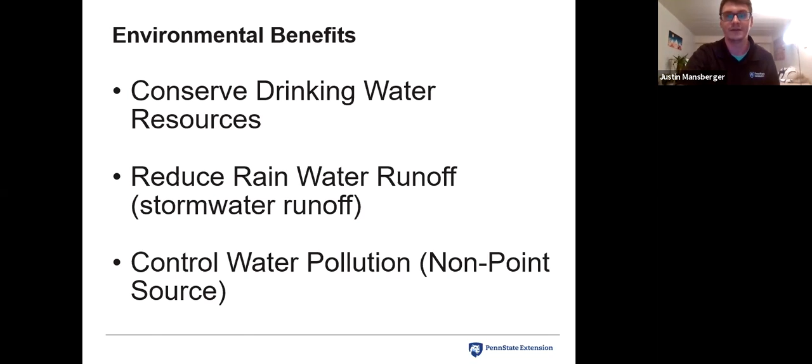There's something called a sizing equation—I didn't want to go through too much math today, but it's a relatively simple equation, and I recommend looking it up if you're curious about getting a rain barrel. Basically, it takes the square footage of your roof and multiplies it by the amount of precipitation to figure out how much rainwater you would get.

We ran the sizing equation for this roof size, which is pretty average for a small home—800 square feet. A 1-inch rainfall event will give you 500 gallons of rainwater for this roof. A 45-inch rainfall per year will give you a total of 22,000 gallons. So there's a lot of water you can gather and use for various purposes with a rain barrel.

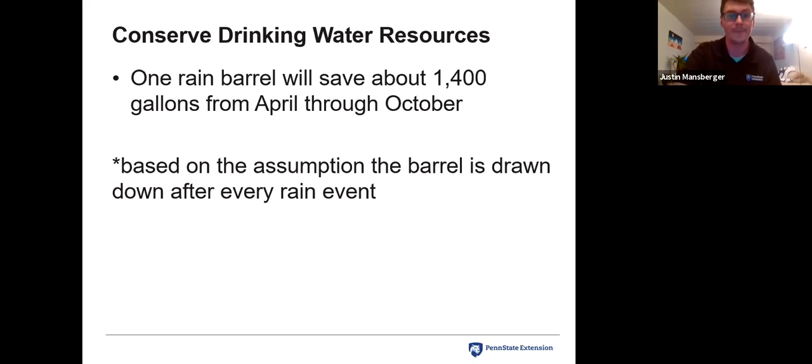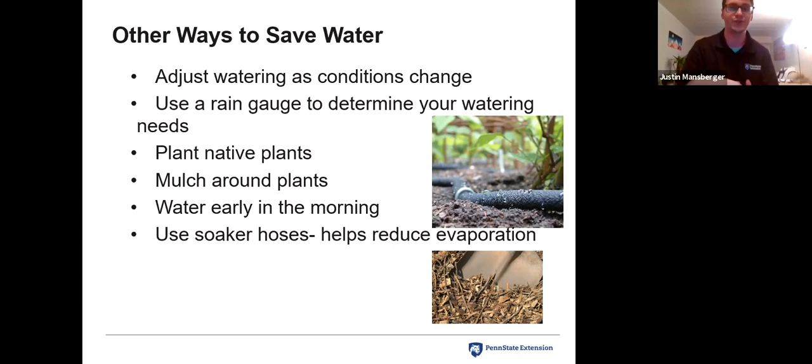Other ways to save water: adjust watering as conditions change. Rain gauges are great ways as well. Planting native plants tends to be more water conservative. Mulching around plants, watering early in the mornings when it's not too hot, and using soaker hoses all help reduce evaporation and reduce rainwater or stormwater runoff.

Here's a nice diagram. On the left we see natural ground cover—in a forested environment during a rain event, about 50% of the water gets infiltrated and only about 10% runs off. That's really ideal compared to a highly urbanized area, which has about 75 to 100% impervious cover—lots of buildings, sidewalks, and pavement. This only allows for about 15% infiltration compared to 50%.

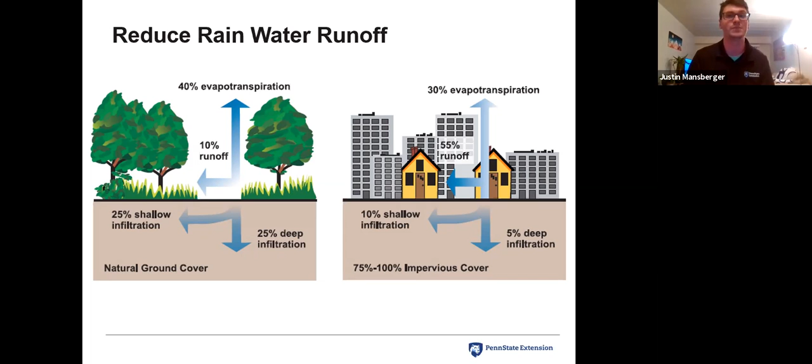You can see here the runoff is much higher as a result of all that impervious cover. Almost or over half of the water that drains down goes as runoff, picking up pollutants and causing lots of problems.

Reducing rainwater or stormwater runoff is really important, and that's another way a rain barrel can help. The volume of water from impervious surfaces exacerbates flooding and stream bank erosion. Rain barrels help reduce the peak volume and velocity of stormwater runoff by catching water from the gutter instead of letting it flow freely onto impervious surfaces.

You can see here in the top picture that's really flooded, causing a lot of flooding problems. And in the bottom picture, you see stream bank erosion caused by a lot of runoff that wore down that stream bank over time.

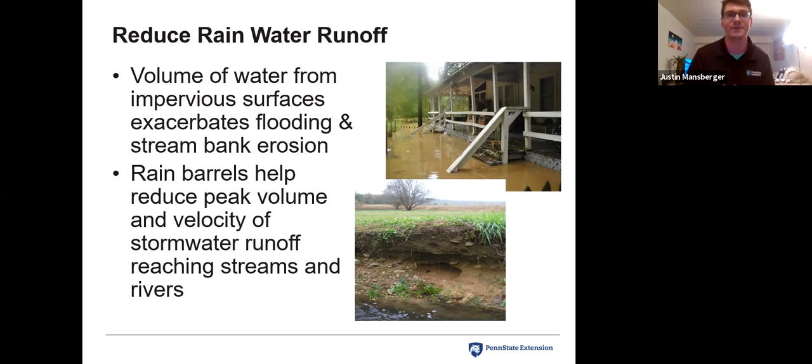So another important thing about reducing stormwater runoff is non-point source pollution, which is created as rainwater passes over land surfaces and picks up contaminants en route to entering our local rivers and streams. Rain barrels will reduce the amount of runoff that runs off your property, collecting it right off the gutter. This helps reduce the amount of non-point source pollution that would harm aquatic and human life and cause problems in streams, with excess nutrients and sediment entering those streams and rivers.

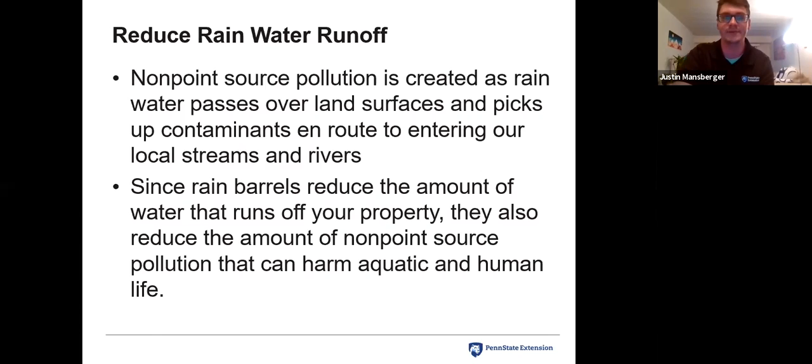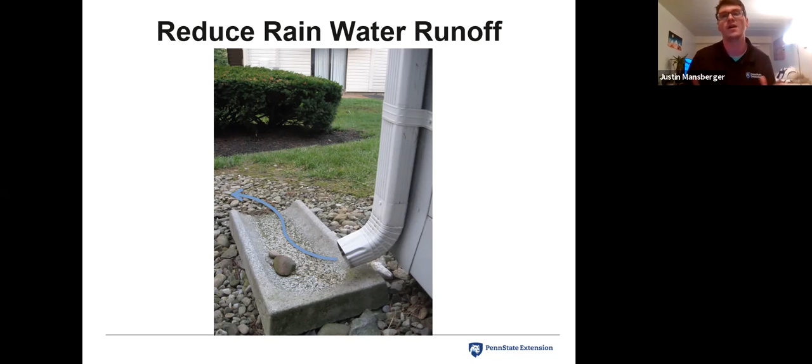As you can see here, this is a typical downspout for a house. It basically runs off right into those stones, then probably flows into the street, maybe into a gutter, eventually right off into the lawn. It hits some of those impervious surfaces and continues to run off, contributing to that non-point source pollution we were talking about.

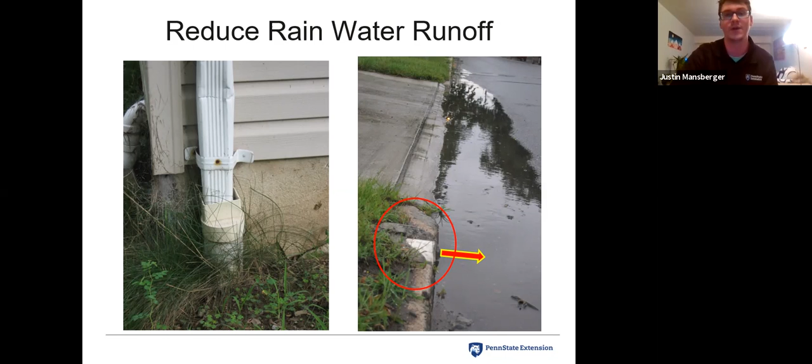Continuing on with those examples of non-point source pollution and flooding, here's another example showing the flow of rainwater and stormwater coming down from the house and also along that sidewalk, then going down and pooling up there. You can even see up the whole length of the road that flowing stream. This is really commonly seen when you have too much impermeable surface and too much stormwater runoff going into a street—you'll often get those flooded sidewalks or streets.

So it's really important, as we mentioned, to control this non-point source pollution. Generally, if you think of non-point source pollution, it's basically our general people pollution—what people contribute is considered non-point source pollution. The alternative term is point source pollution, meaning there's a specific point we can find that the pollution is coming from. This is usually associated with factories, waste disposal, or wastewater treatment sites—you know exactly, and can pinpoint one spot causing the pollution, versus non-point source pollution, which is a conglomerate of everything.

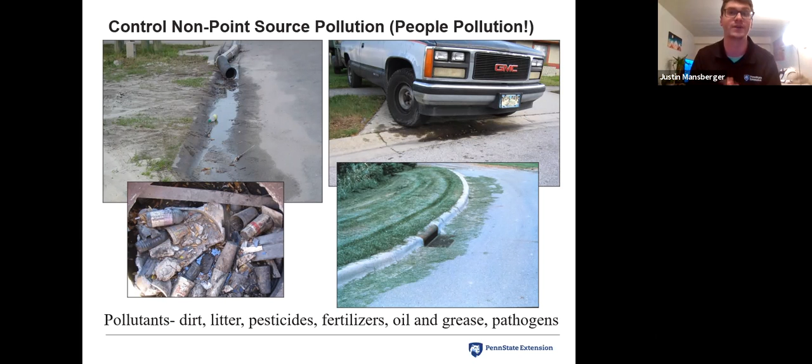Some examples of non-point source pollution: sediment is a huge one. Sediment's actually the second highest pollutant in our streams. A lot of people don't consider sediment a cause of impairment because, okay, it's just dirt, not really toxic or harmful. But sediment can cloud the water, impede aquatic plant growth, clog gills of aquatic life, and even clog BMPs from functioning properly, like rain gardens. It can block them from functioning correctly. So sediment is definitely a major cause of non-point source pollution.

Excess nutrients as well, from agricultural runoff or fertilizers, these can cause algal blooms with eutrophication and cause a lot of fish kills as well. And then obviously bacteria and other pathogens, E. coli, coliform, stuff like that can get into swimming areas and create hazards for both humans and aquatic life, and wildlife.

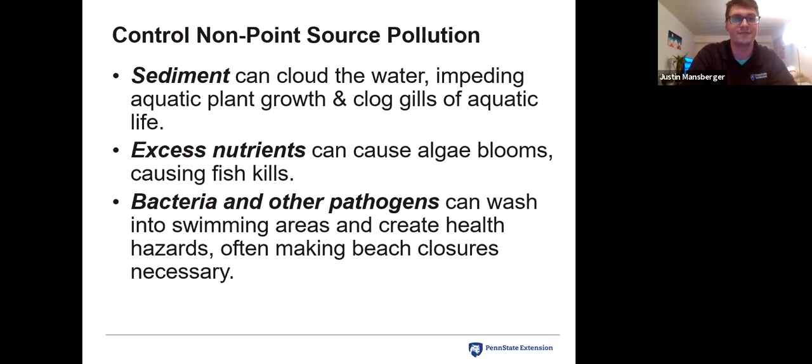Continuing on, debris obviously is a big one. Plastic bags, bottles, cigarette butts, any of this stuff can be washed away, picked up, and degraded into our streams, and obviously has a lot of detrimental effects for aquatic life.

Another really harmful one is household hazardous wastes. So any of the things listed: insecticides, pesticides, paint, motor oil, especially auto fluids, other things like this can often get into rainwater and mix with runoff and then end up in streams as a result of all this excess pollution and non-point source pollution.

So all in all, this polluted water can affect drinking water sources, and this in turn can affect human health, and it increases drinking water treatment costs, because the more stuff they have to treat for, the more expensive it's going to be as well. So it kind of goes back around in a circle.

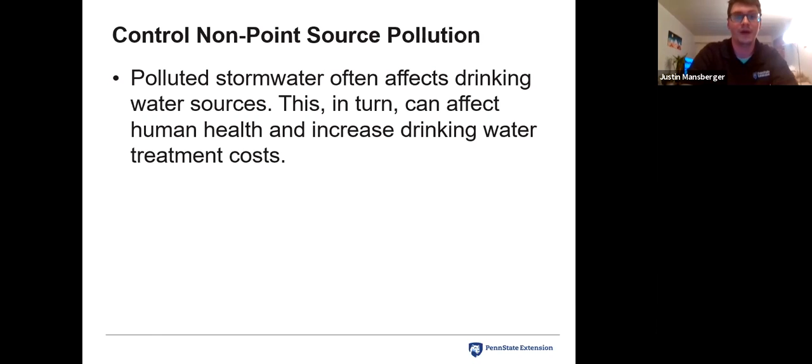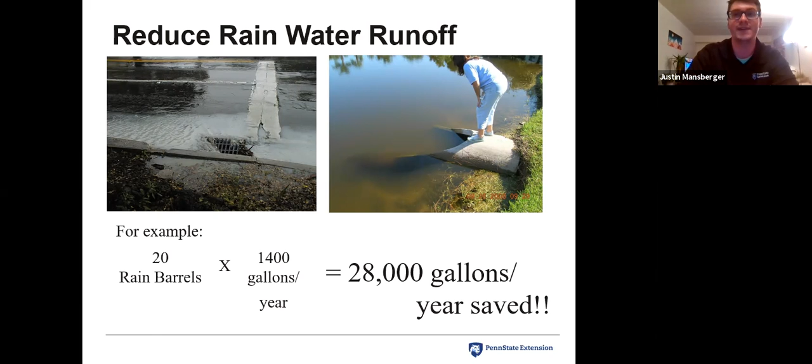So here's something that just rain barrels can do on a whole scale. As we talked about, rain barrels are really helpful for reducing rainwater or stormwater runoff. Here's a bit of an exaggerated example. I'm sure nobody's going to install 20 rain barrels, but you could, on some large industrial site, a big factory or something, if they want to put a bunch of rain barrels at each of their downspouts, this can save about 1,400 gallons per year for each one, 28,000 gallons per year saved, if a large industrial complex would install a bunch of rain barrels. So a lot of great benefits that can go to reducing stormwater runoff.

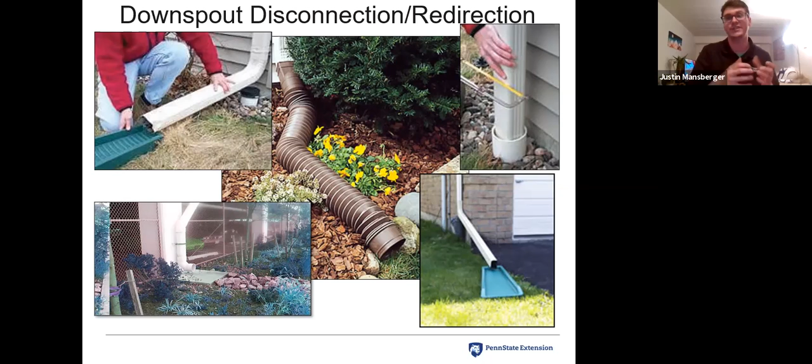Getting into the construction aspect a little bit more: downspout disconnection and redirection. This is the first step we mentioned. These are pictures of traditional downspouts that just drain into the lawn or into the street, nowhere in particular. One of the things you will have to do, whenever you figure out where you want to place your rain barrel, is basically downspout disconnection. Often that'll be done by sawing off the downspout, and you can buy essentially just a downspout connector that goes right into the downspout, and it basically funnels water right into the rain barrel. So benefits for the gardener, or even just a homeowner in general, it doesn't really have to be garden specific.

It saves you lots of money, especially if you're connected to a municipal water system, it saves you all that money from outdoor uses by using that rain barrel. Water collected from rain events is often actually better than treated water, because treated water often contains chlorine and stuff like that from a municipal source. So this rainwater can often be really good for plants and beneficial for that. Also, in times of drought and other things like that, you can really harness, control, and hold on to this rainwater until you might need it for future uses. So it's really beneficial to hold on to and use for a later time when you might need water where there might not be some available.

So rain barrel precautions: it's really important that you don't use this rain barrel water for cooking or drinking. Also, be very careful when using it with edible plants, since the water from the roof might be contaminated with leaf litter, bird droppings, or other airborne materials. Sometimes if it's an old roof, it might even have certain chemicals that the rainwater picks up going into the barrel.

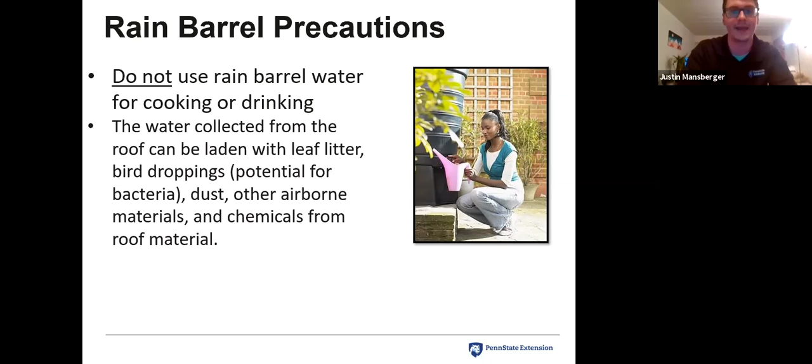So to play it safe, you definitely want to get the water tested if you're using it for any edible plants, just to be sure you don't have any chemicals or contamination from the roof. The water can be used on vegetable plants, but to ensure safety, water near the base of the plant and avoid watering the fruit or foliage, especially with leafy greens. If you tested it and found the water safe to use on edible plants, make sure you're watering near the stem, not the leafy greens.

So, just to reiterate, avoid watering edible plants if you have one of those older tar and gravel roofs, asbestos shingles, treated wood shingles, copper roofs, or any zinc, anti-moss, or other chemicals added onto your roof. You want to be really careful and probably just avoid altogether watering edible plants if you know you have some of these things on your roof.

In addition to the roof, you also want to pay attention to the type of gutter you have, because some, especially older gutters, might be coated with lead-based paint or something like that. You want to make sure you don't collect rainwater if you have a moss killer on your roof, or any added chemicals or treatments on the roof or in the gutters, like lead-based paints.

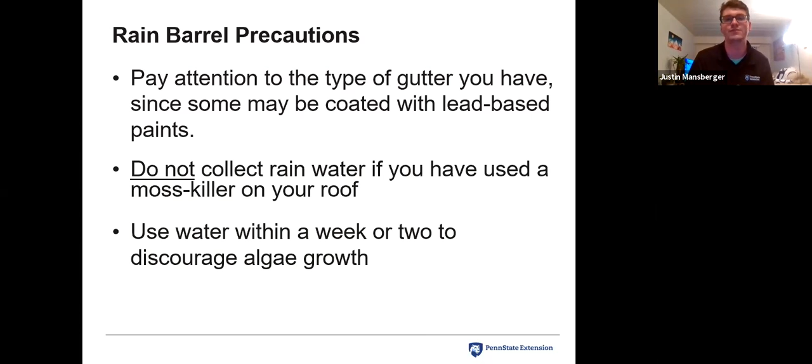Another precaution: it's really good to use the water within a week or two. That helps prevent and discourage algae growth. Otherwise, sometimes it's fine to use longer than that, but just make sure you're monitoring it. Generally, it's good to use it within two weeks to be sure.

So more rain barrel uses - I touched on some of these already. Flower beds are a great idea, probably one of the most common uses, along with gardens. Vegetables, as mentioned, as long as it's tested. Trees, watering your lawn, koi ponds or other ponds, again as long as it's tested and safe for the fish and wildlife. You can use it to wash your dog, your car, or muddy feet, fill toilet tanks when the well pump isn't working, or fill bird baths. Really anything you'd be using water outdoors for, a rain barrel is great to supplement that water.

So, care of your rain barrel: you want to make sure you keep a screen on top at all times, and a garden hose attached to the overflow to prevent mosquitoes. It's really important that the hose and screen make sure nothing can get in - no mosquitoes, bacteria, anything like that. Make sure you change that screen every two years, checking there are no holes in it over time. Always good to remove debris from the screen after storms, making sure there's no leaf litter, sticks, or anything clogging it up.

Really important to disconnect the barrel in winter. You can store it inside or outside with a cover. You definitely don't want to keep it filled with water during the winter because it will freeze and possibly expand and crack the barrel. So definitely make sure you empty it during winter times.

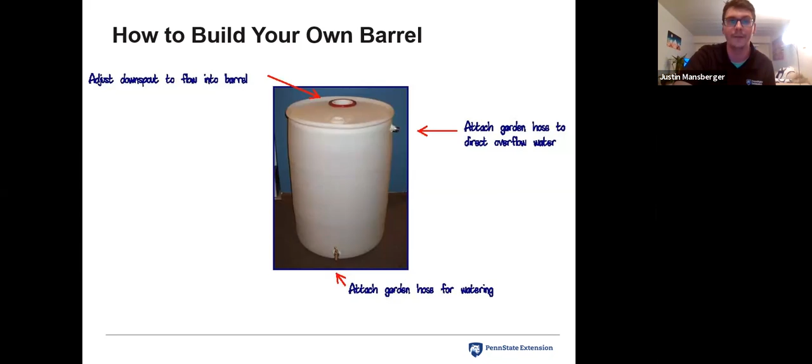So I'll go a little bit through the tools and some of the step-by-step, and then I'll try to grab some of the equipment and walk through that. Here's kind of a basic tool list that you'll need.

A drill is very important for drilling through the top screen, or the top of the barrel, to make the screen. A 15/16 drill bit is usually recommended, that's traditionally good. That way it helps you get the 3/4 inch fittings for the spigot and stuff, so that's generally what we recommend.

A jigsaw is also good, to cut through the top of the barrel as well. The jigsaw is for cutting through the top of the barrel, and the drill is for drilling the holes in the side for the spigot and the overflow.

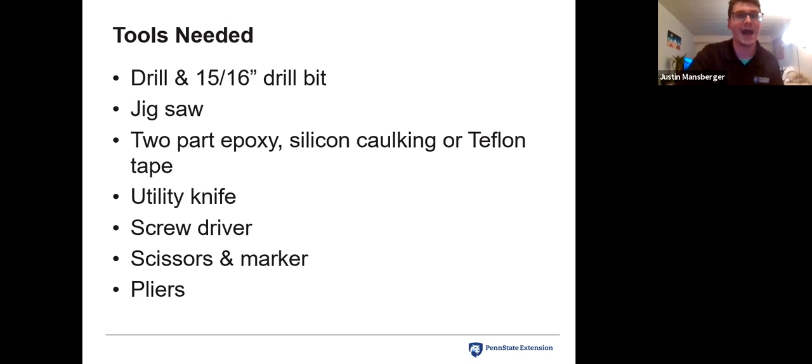Epoxy or silicone caulking, or some kind of tape - I just used caulk for this, which generally seems to work best. A utility knife can be helpful if you need to trim up some of your cuts. You'll need a screwdriver, some scissors to cut out the screen, and also some pliers generally as well.

Safety precautions: it's really important to use safety glasses, and gloves when you're using the caulk. It's always a good idea to have a helper handy to steady the barrel, especially when you're drilling and sawing through it.

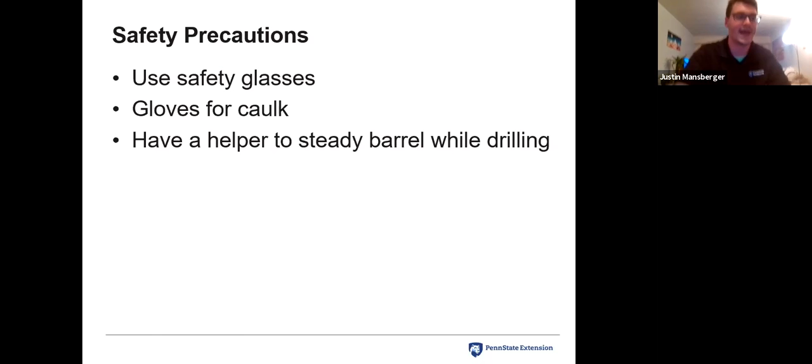Here's some of the parts and supplies needed. There are actually two main ways to do this. This flange, and the flange and metal clamp, are used to make the opening. I'll go ahead and grab this - this is the flange and the screen here. This is actually not necessary, I consider it sort of like the upgraded version to a rain barrel.

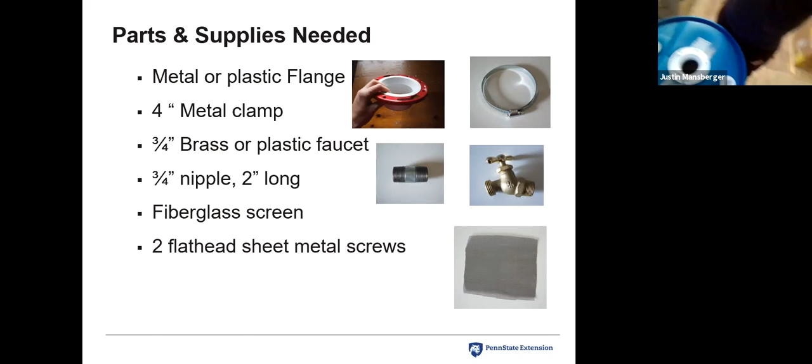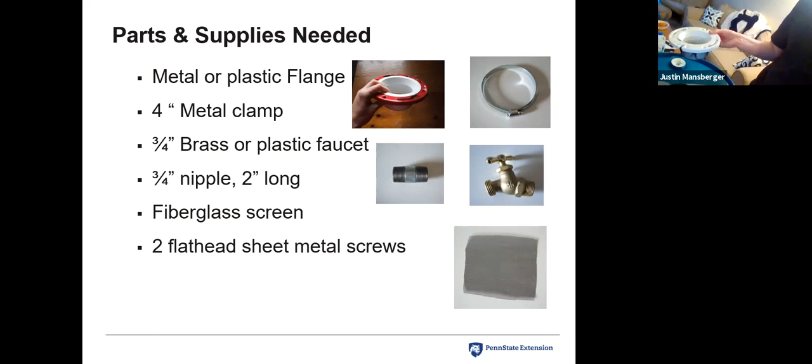What I have here is I cut a little hole through the top, and this basically just sits right in through there - that's the screen that you would direct the water into. That's using a flange, but an alternative a lot of people do is they simply cut a square directly into the barrel and caulk or tape the screen directly onto it, so you don't need to use this flange. I like this a little bit neater and nicer looking than just a big open square with a screen on it, but that's totally optional - you don't necessarily need one.

So I'll keep going back and forth from that, but I wanted to mention this. Let me grab that - so this is the flange here. If you want to do a flange, you will need a metal clamp, but otherwise if you just cut and saw directly into the top of the rain barrel, you won't need this flange or clamp. Either way, you will need a plastic or brass faucet.

As you can see here on the right side, this is going to be the spigot. I would recommend using the 3/4 inch fittings because they will fit perfectly with the 15/16 inch drill bit. If you drill those holes and then use the 3/4 inch faucet and a 3/4 inch nipple, this is going to act as the overflow that you can attach a garden hose to.

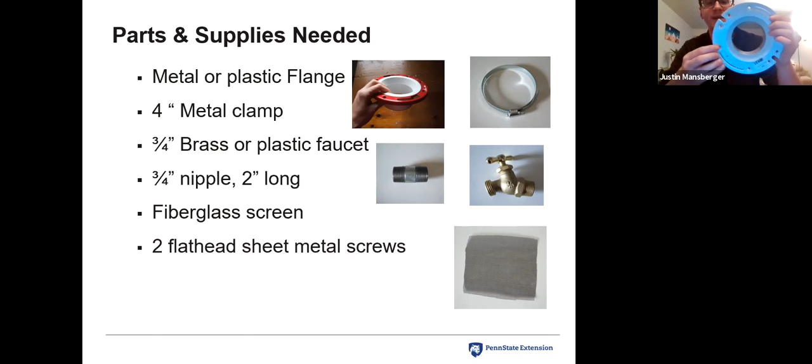The fiberglass screen is also really important for keeping out mosquitoes and other things. You'll also need 2 flathead sheet metal screws, used to screw down this flange. If you don't use a flange, you won't need the screws. This piece will be used to screw right on top of the barrel, screwing down into it to lock it in place and keep it on top of the screen so it doesn't come out.

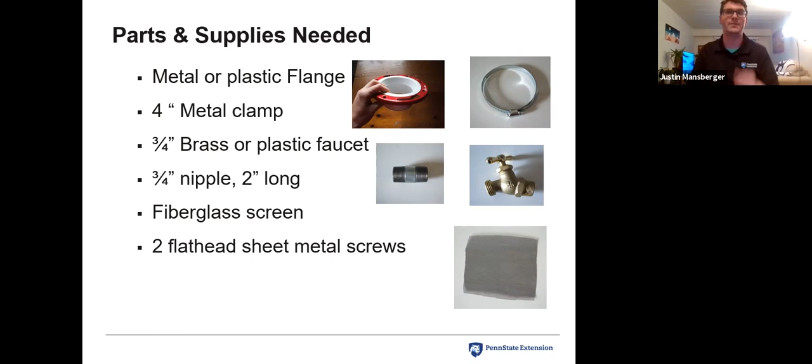So, the first thing you're going to do, if you're using the flange, is trace the outline of the flange over the chosen location for the gutter to drain into the barrel. You would just trace this hole on the top of the barrel, like I had, and then cut it out. Or, the easiest way, drill a hole through the center.

Then you can cut it out using a jigsaw, starting there. You basically just cut a circle in the barrel that this can slide over. Or, like I said, if you don't want to use these flanges, it isn't necessary.

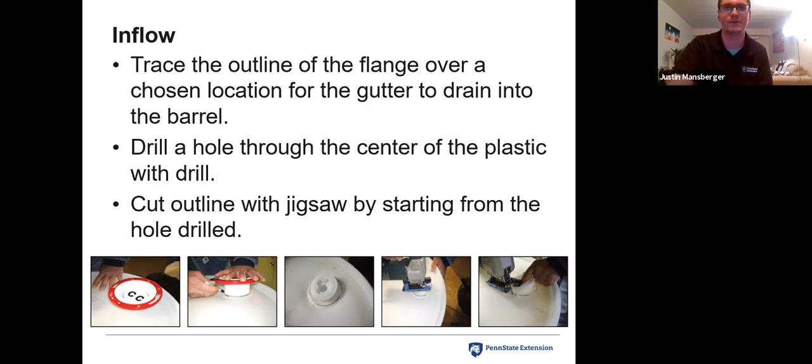If you want to do the easier model, not that the other is really complicated, you would just cut a square - it can be this size or bigger, it doesn't matter. You cut a square and then basically paste that mesh screen right on top and caulk it into place without using one of these flanges. Hopefully that makes sense, but I'm happy to answer any questions if that's still confusing, since I don't really have one to demonstrate that way.

So going on with the inflow - this mosquito netting that I mentioned, you're going to want to secure this around the bottom. As you can see here, I basically just wrapped this around. You want to make sure you get it as tight as possible, so the screen is really taut and tight with not much give.

Then you just secure it down with the metal clamp, as I have here, all the way down to the bottom to hold it in place. Then you just go ahead and trim the excess netting as needed to give you this nice little top screen part. Then, as this sits on the barrel, you direct the downspout directly so it flows right into this and fills up your rain barrel.

If you need to, you might need to use the jigsaw to cut a small notch to allow this. If you can see here, where you screw in, you might need to add an additional space to get that in the barrel as well. So be wary of that.

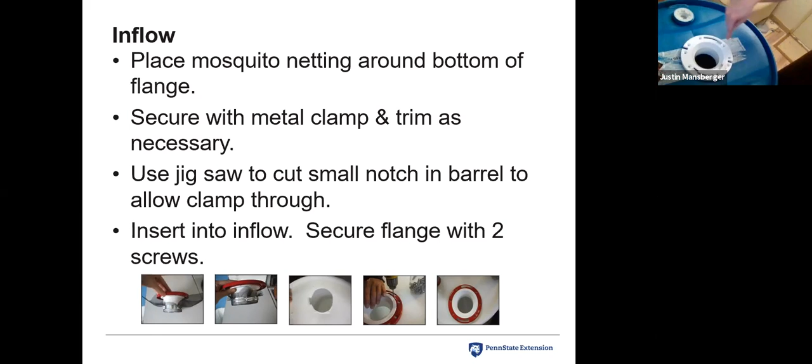Basically, all you do is insert this - let me try to bring this back here - so you just get that inserted in there. Then, as I mentioned, you just drill 2 screws through there to hold it in place, locked and ready to go. That's how you make that flange inflow, ready to go.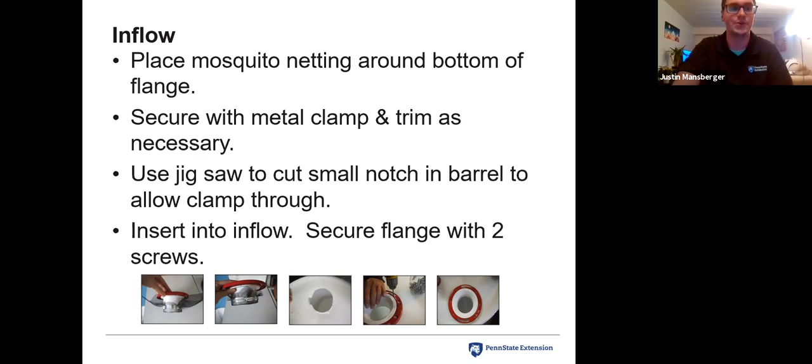Hopefully that's pretty easy - like I said, that's the more complicated way. Otherwise, you can just simply cut a square or a circle in the top of the barrel, whatever, and basically caulk that screen right onto it. So the next important thing is the spigot - it's important to think about where this will be positioned.

Usually you want it towards the bottom of the barrel, generally about 6 inches from the bottom. Once you find a spot, use that 15/16 drill bit to drill a hole right through the side of the barrel. Then place the spigot over the hole, and it should thread nice and easy, kind of like a screw going in. If you need to, use your utility knife to carve out and increase the size of the hole a little bit.

Once you get the spigot about halfway through the barrel, add epoxy, caulk, tape, whatever you're using, to make sure it's all sealed in there, no room, caulked up real good and sealed well so there's no airflow or anything like that.

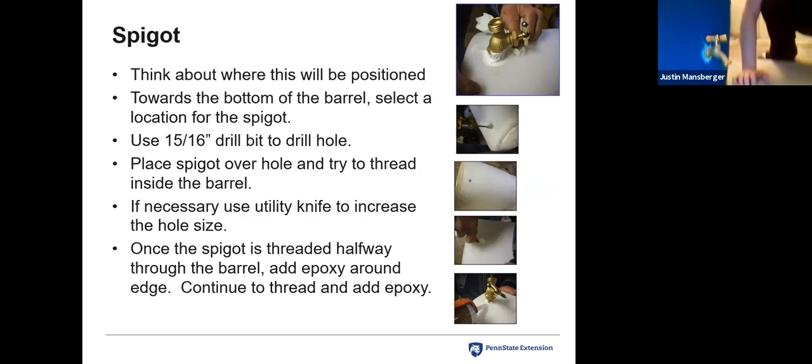So I'll go ahead and show this down here. This is what I have as the spigot. As you can see, I drilled this hole in the side of the barrel about 6 inches above the ground. Once I got it the whole way in, I just threaded it through and twisted it in there, then got some caulk on my finger and sealed that up.

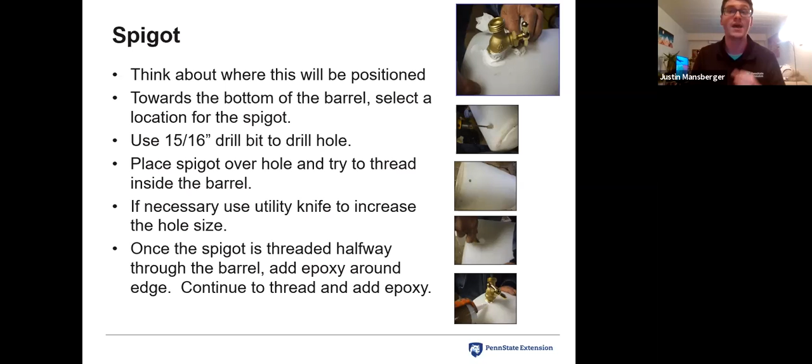You can open and close this and attach a garden hose onto it as needed. You can use any sort of spigot or faucet, it doesn't have to be that same brass one. I recommend keeping that 3/4 inch and using the 15/16 inch drill bit if you can, because I know both of those sizes work really well together.

So the next thing, basically the same exact process. For the overflow, you're going to select a location, generally about 3 to 6 inches from the top of the barrel. I like to do mine on opposite sides, the spigot on one side and the overflow on the other, but that's entirely preference. It doesn't matter where you have them, as long as the overflow is at the top and the spigot is about 6 inches from the bottom.

Again, you use that 15/16 inch drill bit to drill the hole through the side. Get that nipple and do the same thing, thread it through the barrel like a screw. If you need to increase the hole, use the utility knife. Once it's about halfway threaded through, get some of that caulk or epoxy and seal it up, then keep threading it through till it's nice and sealed and ready to go.

I'll go ahead and show you. Like I said, I like to do mine on the opposite side, but that's entirely preference. So what you can see here, mine's basically right at the top, probably even fewer than 6 inches, about 2 or 3 inches. We have this nipple here, same exact process - I threaded it through, got some caulk, sealed it up real good. That's ready to go, the overflow here.

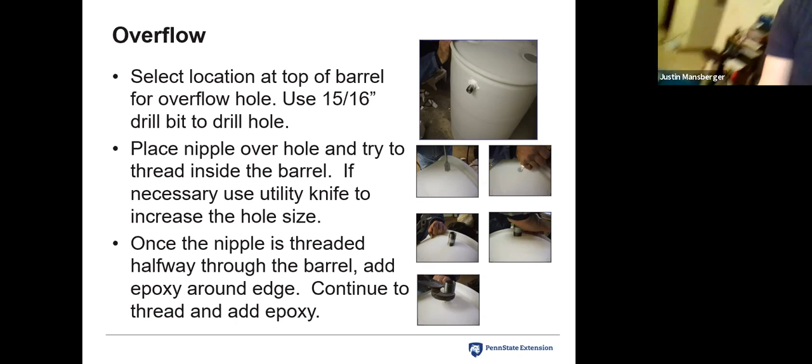And then, like I said, make sure you attach some sort of hose or something, and you can redirect that to a rain garden or any sort of garden or anywhere you want excess water flowing to.

And then that's really all there is to it. Like I said, it's a pretty simple process. There's not really much to it.

It's really important when setting up this barrel that you know the location ahead of time before you establish it. Here's a good traditional setup. It's good to put some sand or gravel down to help level it, because it's important the barrel stays level rather than sitting on grass or dirt that might be uneven. Then, as you can see, put some bricks or cinder blocks, basically something under the barrel to raise it up and create a platform.

This is really important because it helps increase the water pressure coming out of the spigot. Otherwise, if it's on ground level, you might not have the water pressure you need to get enough out through the hose if you're watering things. So it's good to keep it elevated to help out in that sense.

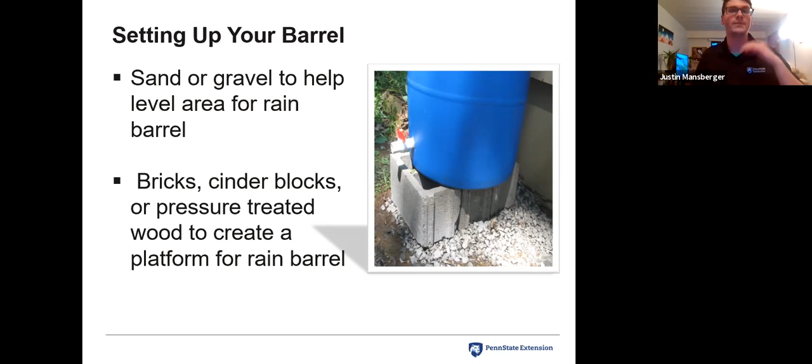Here's a little more about connecting to your downspout. You can see the flexible adapter I was talking about. You can pretty easily get these along with other supplies at Lowe's, Home Depot, or similar stores. Here's one with a dual splitter like the one I showed you, but that's not really necessary unless you have two rain barrels or something like that.

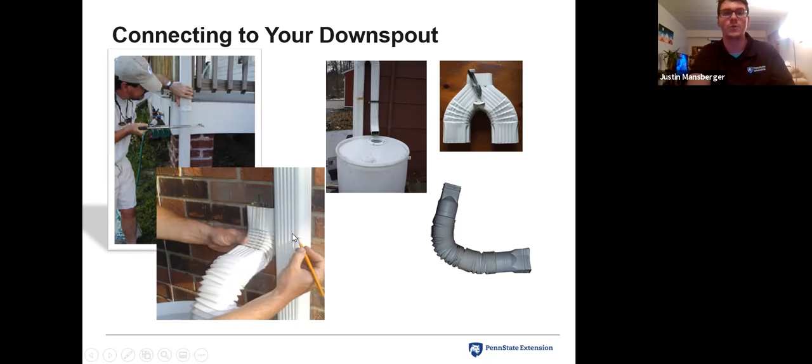So here's a demonstration. You'd want to mark where you want to cut it, and then go ahead and cut it with a saw or something, as you can see in this top picture. Then you just slide the flexible adapter right in and make sure it's directed to flow into the top of your rain barrel through the screen.

So a few last notes to wrap this all up. Mosquito dunk is available to prevent mosquito larvae. It's another thing we recommend that kind of goes hand in hand with the screen, which is really important. You can get this at local hardware stores, home centers, and similar places. Another good tip is that two tablespoons of vegetable oil can break the surface tension so mosquitoes can't land on the water, a helpful little trick to weed out mosquitoes.

You can also connect barrels to other rain barrels. Basically, you take the overflow of one and connect it using a hose to flow into the top of another, connecting them side by side. It'll flow from the downspout into one rain barrel, and once that one fills up, it'll flow into a second rain barrel, and so on.

We do have, a lot of times, rain barrel workshops through Penn State Extension. I'm not sure if there are any going on in your counties, but I encourage you to reach out to your local Master Watershed Steward coordinator to see if there's a rain barrel workshop or similar opportunity for you to make your own rain barrel.